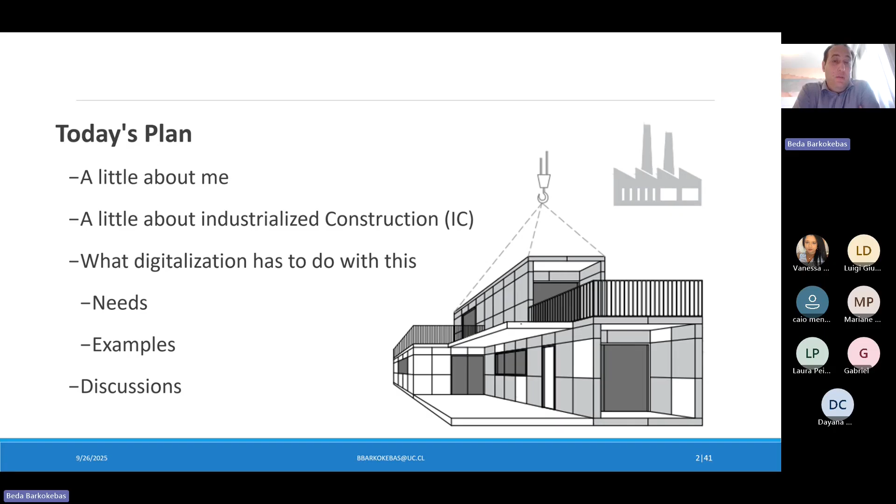So today's plan, we're going to talk a little bit about me, a little bit about industrialized construction, and we're going to talk about what digitalization has to do with this. We're going to discuss, more importantly, what are the needs and give you some examples of what can be done on the research side and also on the industrial side. And then we can talk about it.

So, as you guys already know, my name is Beda Barkokebas. I'm a civil engineer from Brazil. Well, I'm actually from Canada as well. I'd like to point this out. I'm a proud Canadian myself as well.

So I did a master's degree and PhD in Canada, the University of Alberta, and those are some of my projects.

I say that I have two hats. One as an engineer, as a construction engineer. I started my path in industrialized construction actually in the industry, doing social housing in Brazil with concrete-based systems. Then I moved to steel structures, heavy steel structures, light steel frame.

When I moved to Canada, I started working with modules, wood modules, wood panels, pretty much wood in general.

Then I started working again in Brazil as a consultant, developing some products for social housing, for mid-rise buildings. And lately, I've been doing also bathroom pods. And here are some of the companies that I have the pleasure, or had the pleasure, to work with.

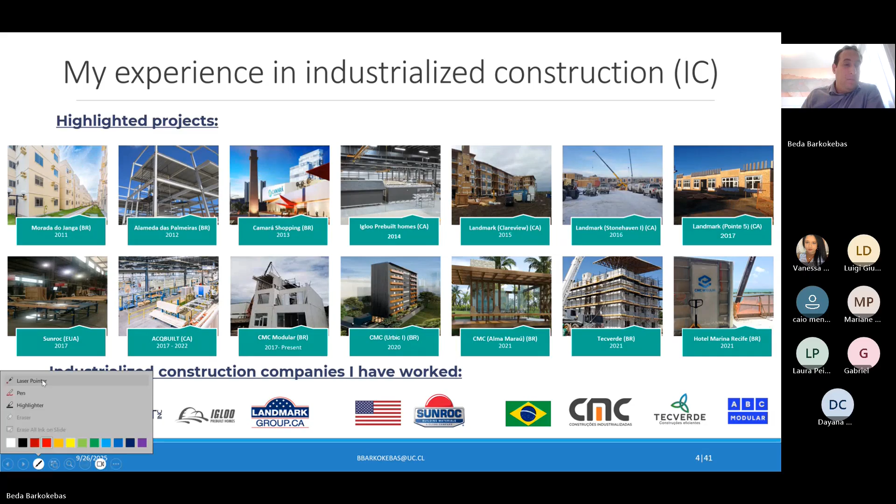On my academic hat, I work on the belief that data and technology can actually improve our productivity. So basically my motto is use data to improve processes, to improve physical processes.

So I do a little bit of product development. My main expertise is actually simulation, Monte Carlo simulation, discrete event simulation. But I also do a lot of programming regarding BIM, automation of design tasks and procurement tasks using BIM, and also I do data mining with sensors collected on the factory to improve productivity at the factory using data.

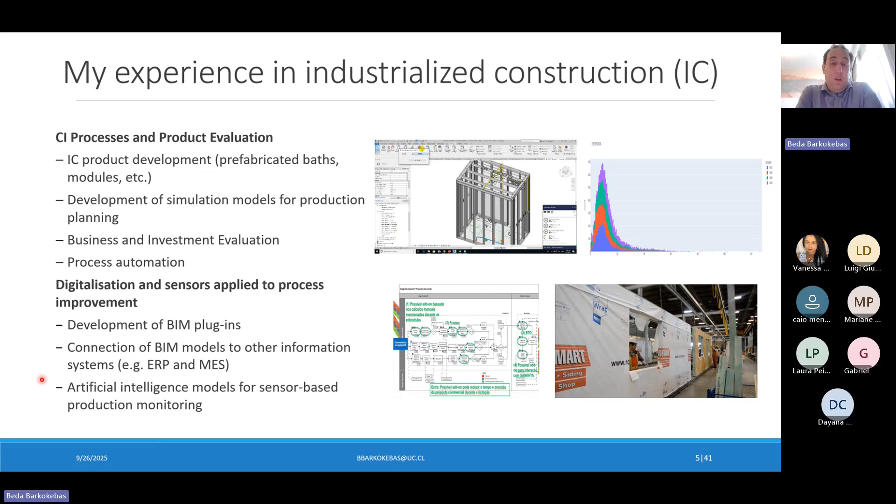So why change? A lot of my friends ask me, why do you want to change? Why do you want to shake things up with industrialized construction? I'm sitting in a hotel now in Brazil, and as far as I know, nothing here was industrialized.

So I always say that the construction industry has two problems. One is the productivity problem. You guys already know that the construction industry is not as productive as other industries, etc. We all heard about a project that is under budget, over budget, that is delayed. It doesn't matter if it's an infrastructure project or if it's refurnishing the bathroom of your mom. We always hear about construction projects that are over cost and delayed.

And if that's an industry problem, I think it's not that big of a deal. It's a big deal, but it's not that big of a deal. But I think the construction industry, which affects society so much, this becomes a social problem. I'm not saying that we have housing problems because of the construction industry. I'm just saying that a big part of why we still have a social housing problem or infrastructure problem is partially because of the construction industry.

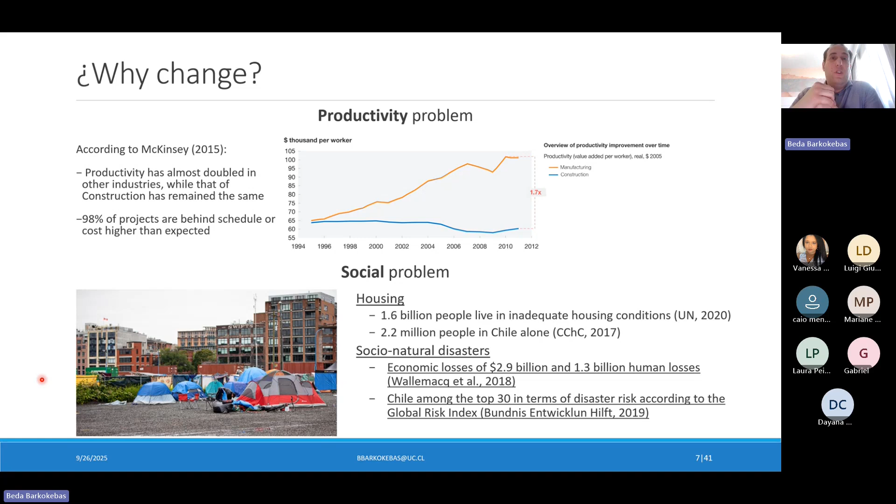So talking about industrialized construction, I'm not going to do a lot of discussion on the definition. I actually enjoy this definition, and we can use it for the context of this class. This is from the Housing Ministry of Chile, which says that industrialized construction is defined as the act of executing construction in an industrialized manner, generally in a plant or factory, integrating one or more elements in which all components are integrated into a global process of execution and assembly, mainly applied on assembly and finishing activities on site.

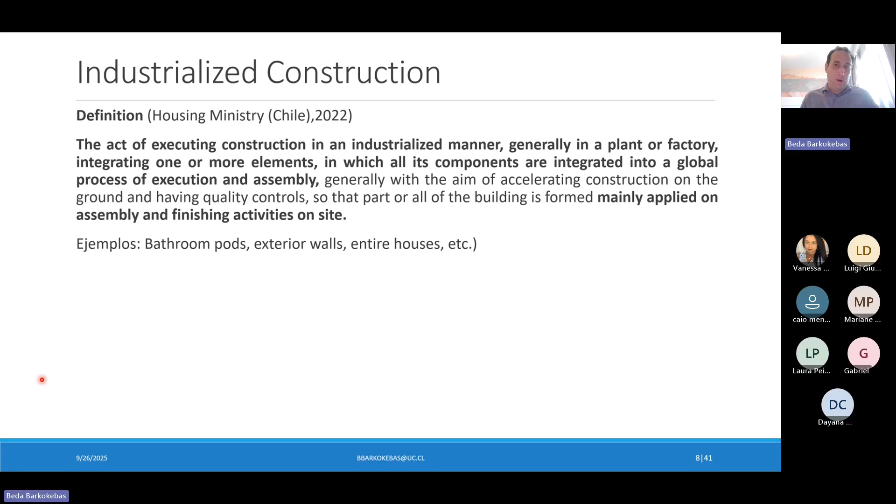So a few examples are bathroom pods, exterior walls, entire houses. But one thing that I like about this definition is that it's not really focused on the product, but on the process. And that's where things change. We improve the process, right? It doesn't matter on the material, and industrialization is often confused with prefabrication, and that's not necessarily the case, right?

So you can industrialize your job site without needing a plant. You don't necessarily need to prefabricate everything in a plant, in a factory. You can industrialize your job site with some construction methods to increase efficiency in your job site. So that's why I think this definition is so powerful. But again, if you have a different definition, I'm okay with it.

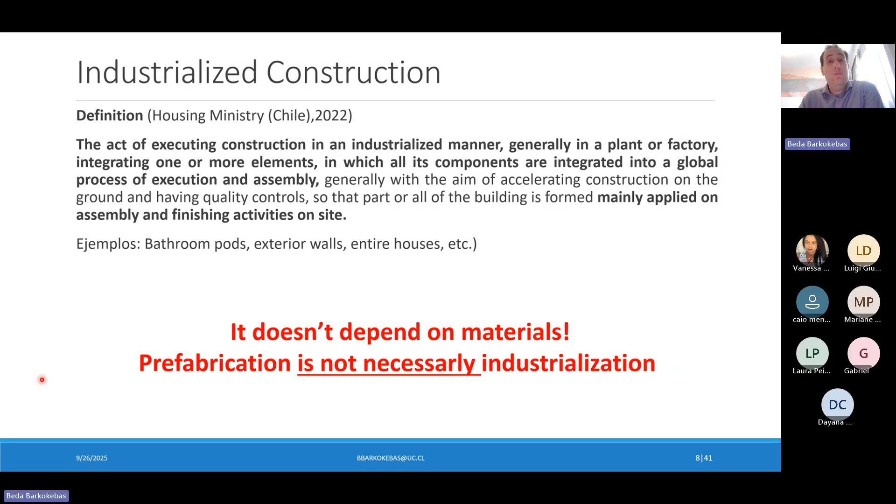So modern methods of construction is a taxonomy that was asked by the Housing Ministry of UK. So they didn't develop this themselves, they hired a consulting company to do that. So in a way, what is a taxonomy? It's a way of putting different industrialized construction methods into boxes.

So we have 7 categories. The first one is modern methods of construction 1, 3D structural systems. So pretty much boxes, right? Usually rectangular, but you can have different shapes. What matters is that it's three-dimensional and structural.

Then you have 2D structural systems, which are panels - walls, floors, roofs, everything that is 2D, you can put in this box. Then primary structure - sorry, I have to update this - but we're talking about linear structural elements: beams, columns, stairs. This is actually really applied in industrial construction.

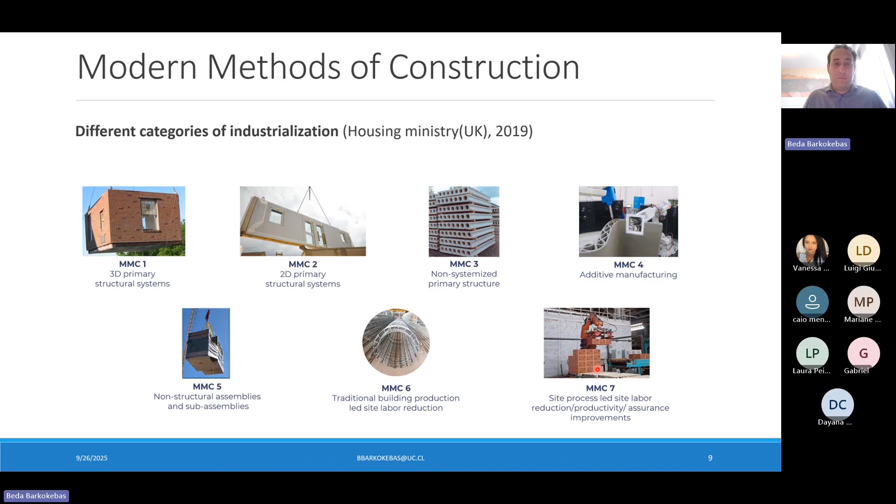So what does digitalization have to do with that? In the context of industrialized construction, we have two key main differences. According to the Handbook of Construction Tolerances, for a traditional reinforced concrete structure over 25 meters in height, I have a tolerance of 75 millimeters.

If it's inside, we're talking about 152 millimeters. If we're talking about a precast column, this tolerance goes from 76 millimeters to 25 millimeters. So if I go to an industrialized construction method, my tolerance is reduced by a third. Something similar happens also in steel - my tolerances are much more significantly reduced, which is tough to do, especially when I have an interface with on-site elements.

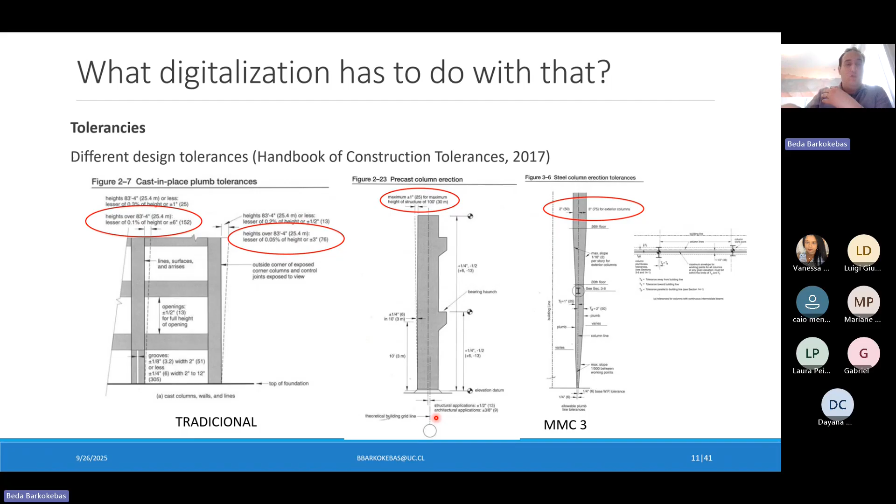So, for instance, my column can be prefabricated, but the foundation is done on site. So I really have to be careful here, not only to design a lower tolerance system, but also to predict how this reduced tolerance is going to play out when you go on site - when I have to assemble this precast column into a foundation that was done on site.

And also there is the data management aspect. You all know about the life cycle of a project, but when it comes to fabrication, that's a different ballgame. We're not used to doing fabrication models in construction - we're used to doing shop drawings, which, in the first place, follow a tolerance that is 3 times higher.

Every industrialized contractor has their own way of doing things, and that results in a lot of duplication of data because there is mistrust about whether the information that people on site send you is actually correct. If the MEP disciplines take into account the construction system done in the factory, and not a lot of people do fabrication models or fabrication drawings for a living in the construction industry, every company ends up doing their own thing. But nevertheless, they have a lot more common challenges than they would think. That's another story though.

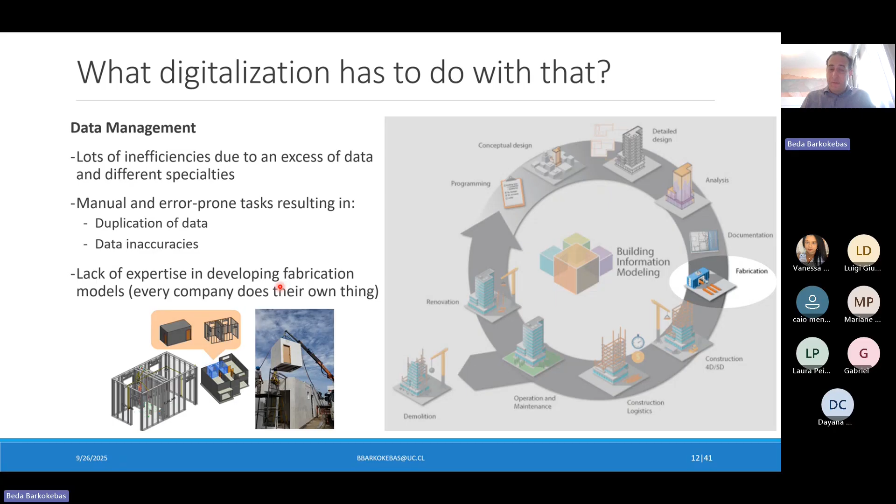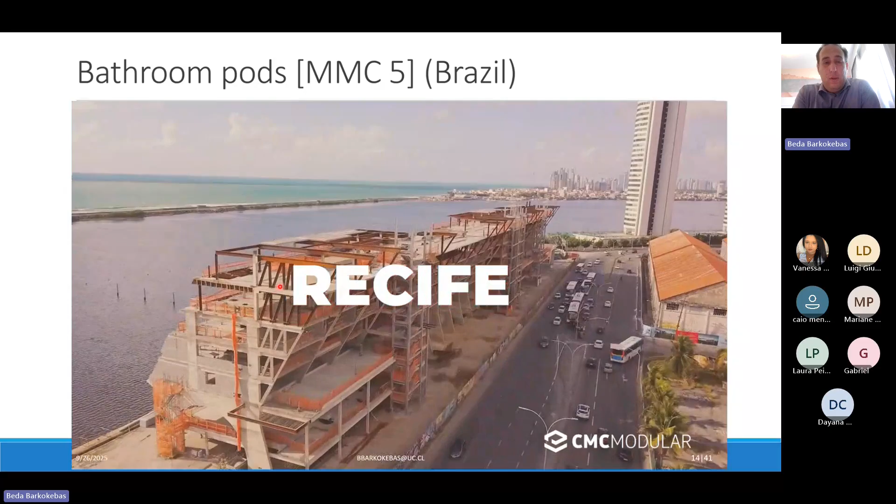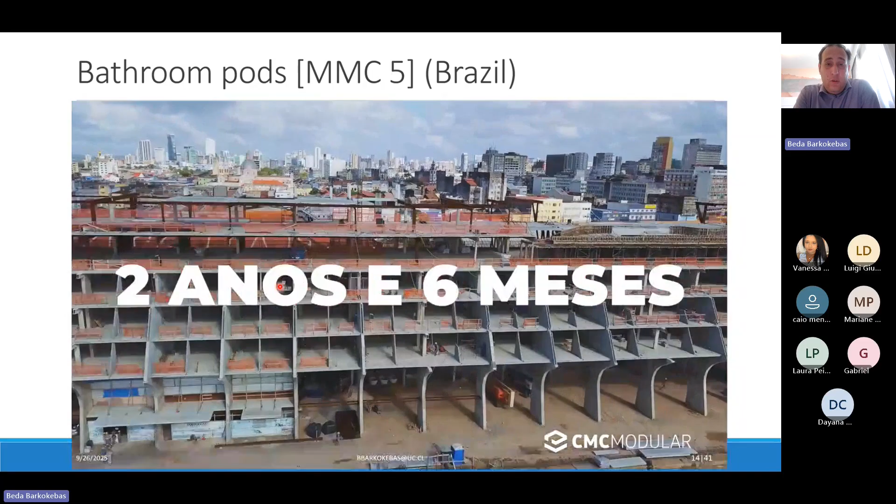So let's dive into some examples. This is my city in Brazil, Recife. This hotel was actually done on site, and the structure is very complex, shaped like a sailboat, which is good for the architect but challenging for the engineers.

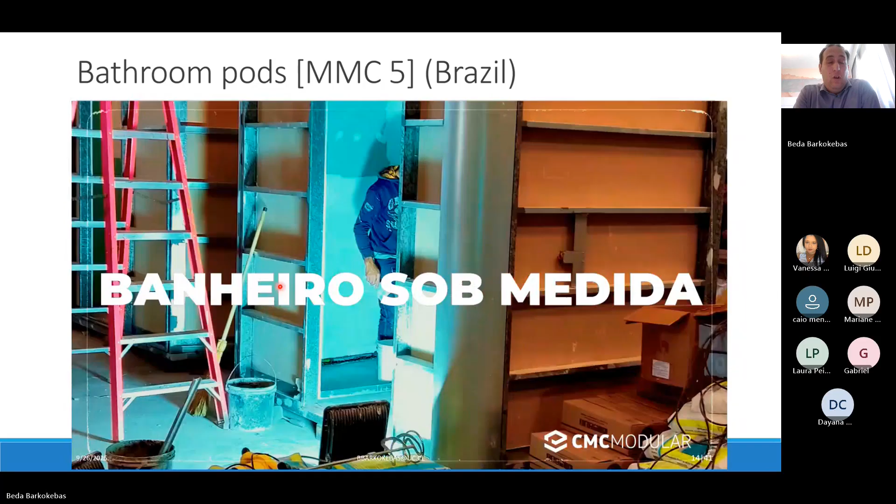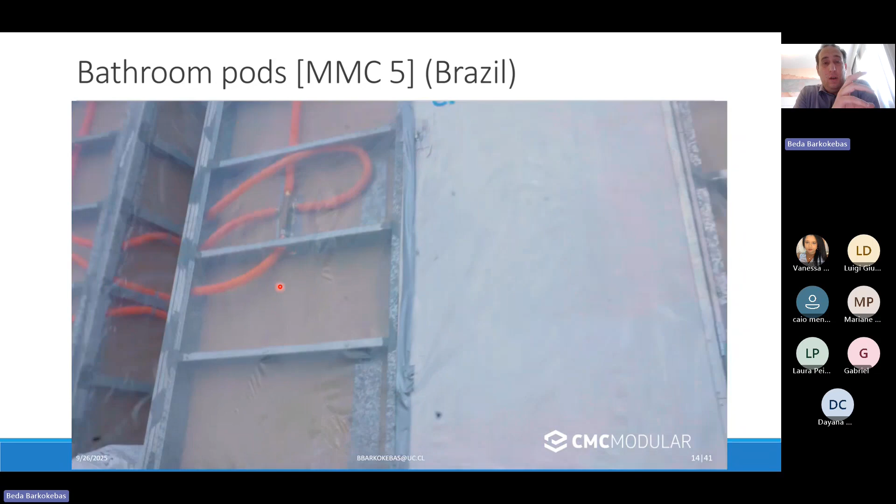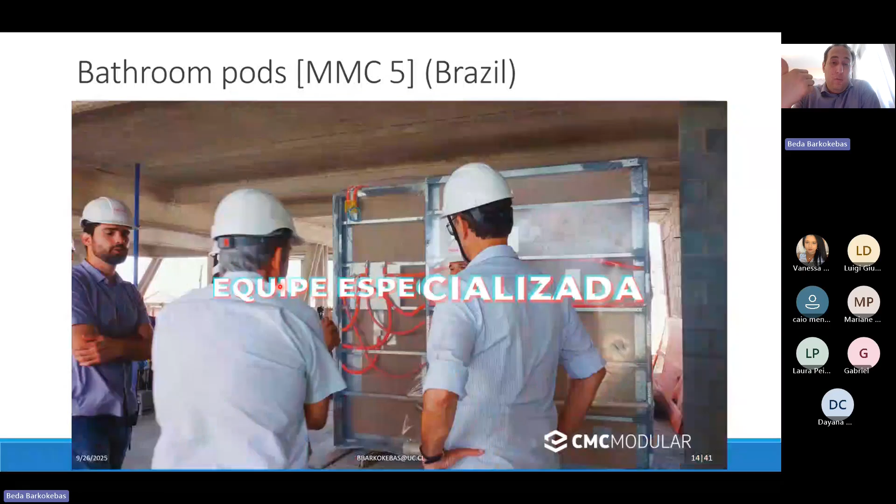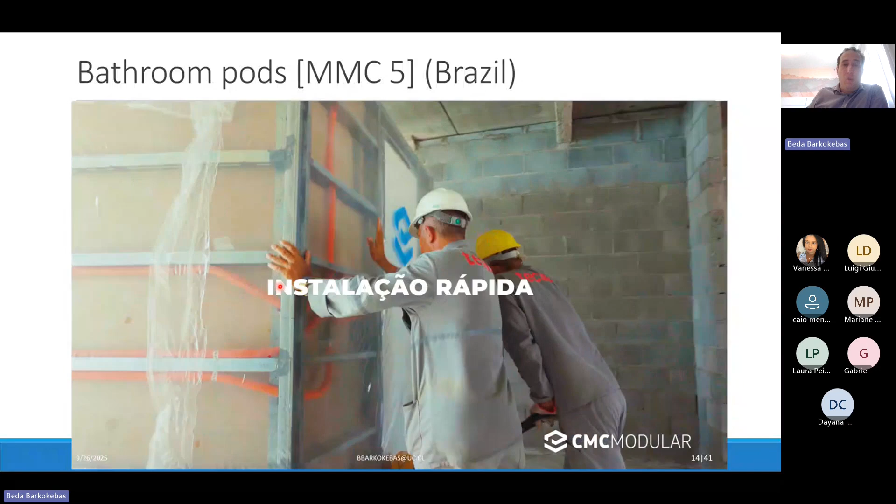After the structure, the bathrooms are a very complex area of the hotel. In this project, the decision was made to remove the risk of building 320 bathrooms on site with a really tight schedule, and instead do that at the factory. So the structure of the bathroom, the substructure, all installations, waterproofing, and finishes were all done in a factory around 3,000 kilometers away from its final destination.

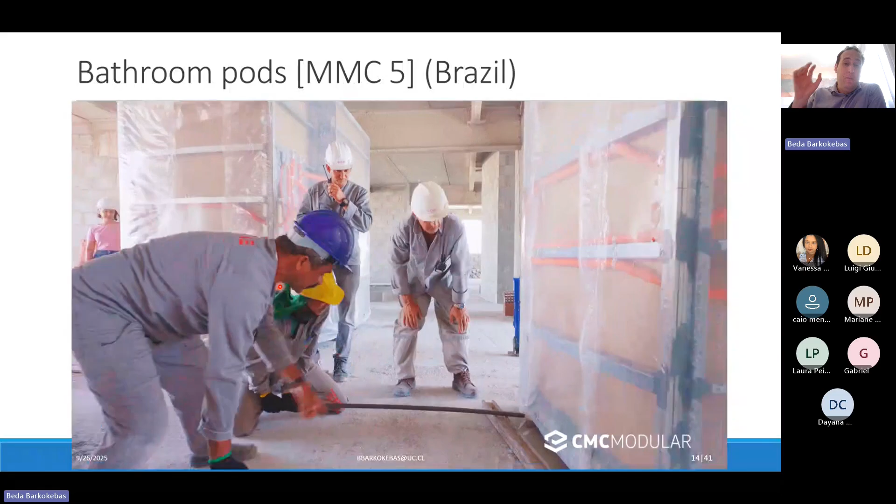This bathroom was tested a couple of times in the factory, placed into a truck, driven 3,000 kilometers, then rigged by a crane and installed in its final destination.

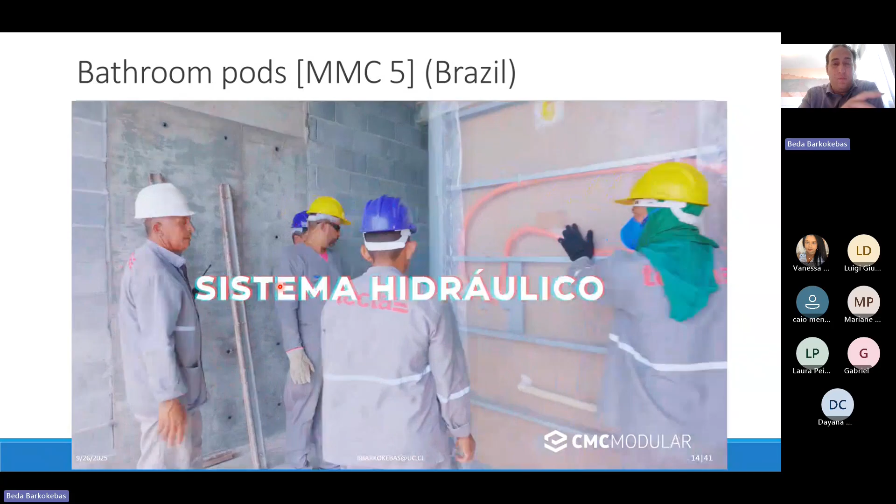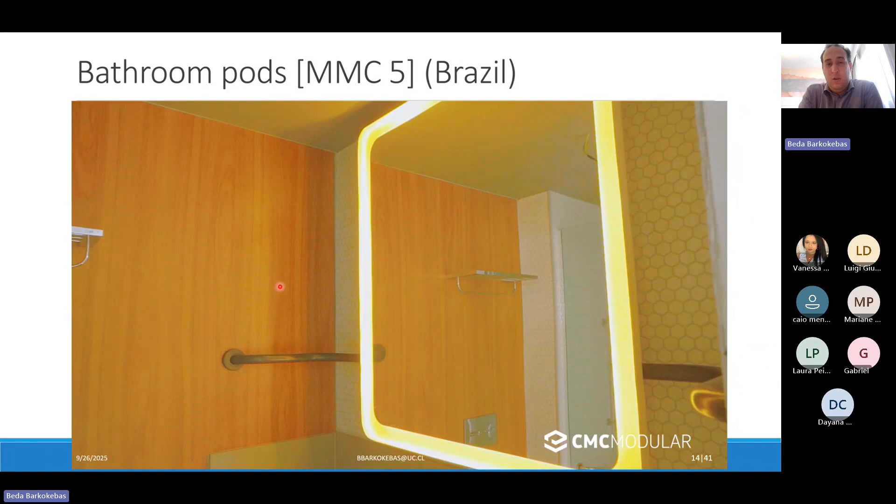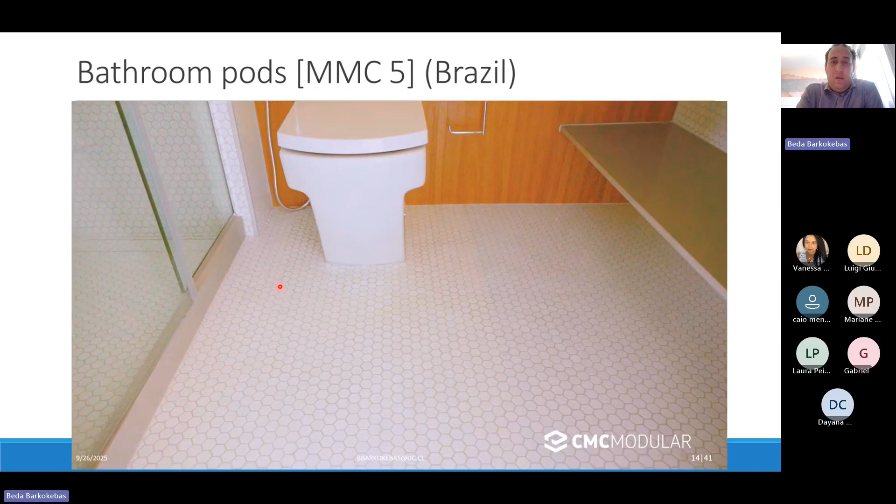So those are the two prototypes that we've done, being placed at their final destination. Everything you see inside was actually done 3,000 kilometers away. Of course this is a 5-star hotel, but as you can see, the level of finishes is very good.

These two bathrooms, by the time they arrived at the site and were placed and tested, were good for use in around 5 hours. So 2 bathroom pods in 5 hours. Then they accepted the prototype, we started production, and the other 318 pods were delivered in 4 months. So 320 baths in 4 months.

We had less than 2% material losses on site. According to the client, they had a reduction of 20% in schedule. I talked to the contractor and reviewed the quality check, and only 5% of those bathrooms had defects on site after installation. That 5% is something, but I'm pretty sure those are results that are not easy to come by in traditional construction.

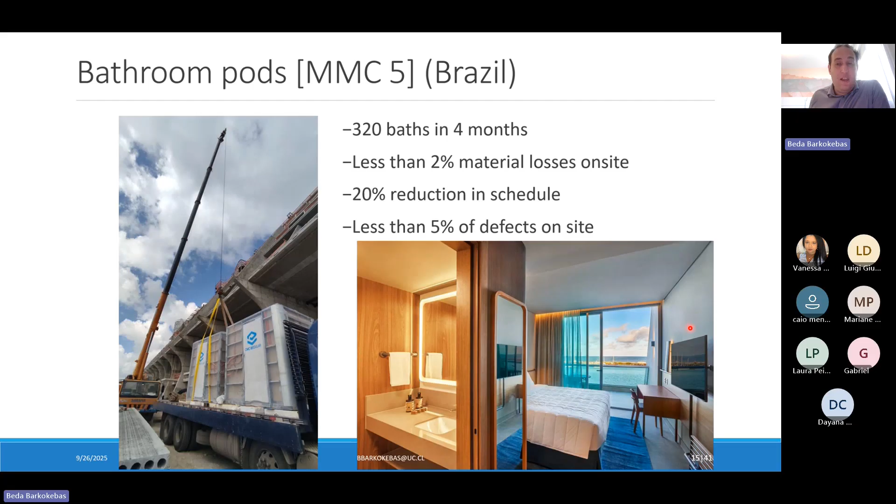A lot of people ask me what's the difference in design between traditional construction and industrialized construction. The best way I like to put it is that it's a structure that walks. So for this bathroom, if I do an industrialized construction bathroom, I have to comply with all the codes applicable to traditional construction, no questions asked - electrical codes, sanitary codes, fire protection, structural, you name it.

At the same time, I have to account for torsions that this bathroom is going to endure while being transported and rigged. So in a way, the structure of a prefabricated pod bathroom is actually stronger than traditional construction, because traditional construction doesn't have those stresses, while in industrialized construction I have to account for all the transportation stresses. Those are dynamic stresses - we only have static stresses in traditional construction.

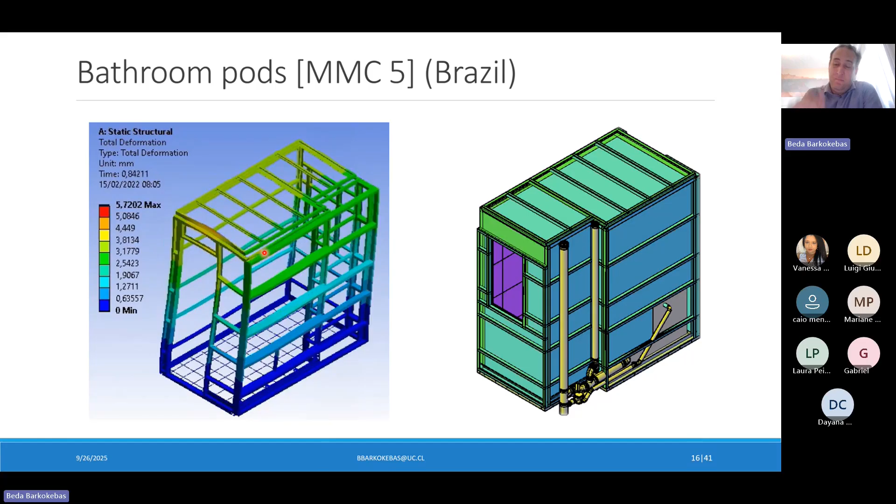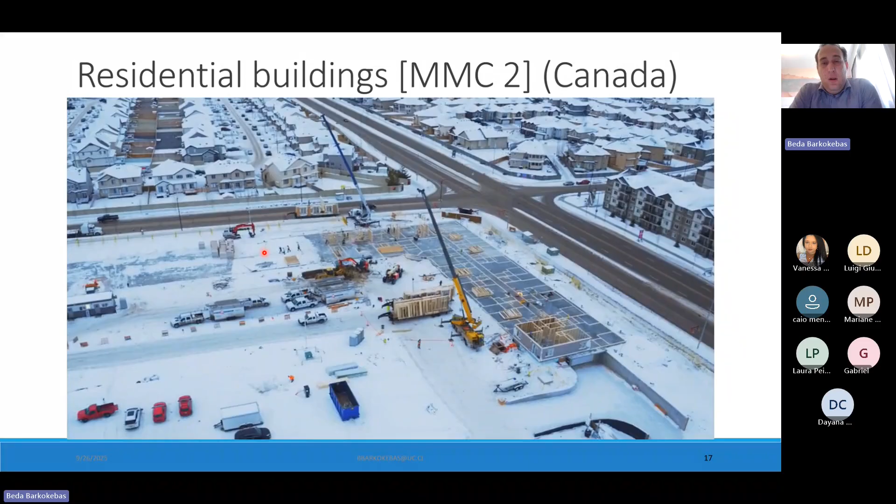So I'm going to show you my city in Canada. This is Edmonton. I was very happy, very fortunate to work in the first panelized building in my city. So what you can see here, this is a residential building.

It's a four-story building. In Canada, we do a lot of wood construction up to 6 floors now. At that time, it was only four. That's what the code allowed, but now we can do up to six. And what you can see here is we're talking about 64 units.

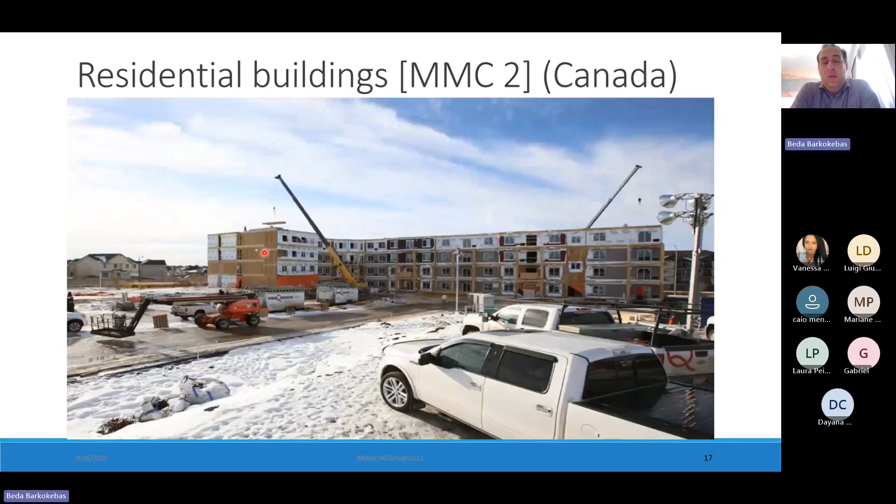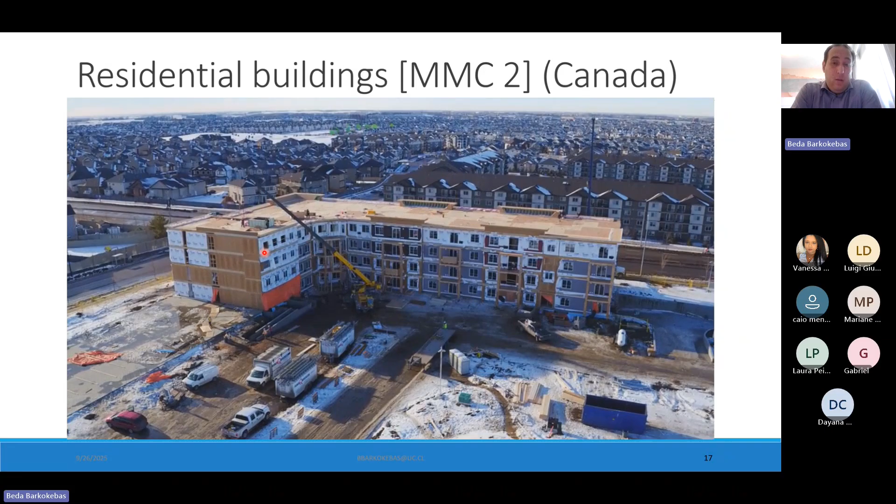All the panels, all the floor, roof, and wall panels, they arrive prefabricated, with exterior finishes, windows, doors, insulation. This is a time lapse of 25 days. The original schedule would account for 4 months, and we did it in 1 month.

Some information about this: those are 64 residential units. One thing that is important to note is that in Edmonton we have to do a mix of building or of apartments. So I need to have a certain percentage of one-bedroom, two-bedroom, and three-bedroom apartments. Because of this L-shaped configuration, we have 64 units, but also 13 types of apartments.

Which is a challenge because, like, I loved in Brazil when we did the same apartment and just mirrored the building, then did one or two types of buildings and replicated these across. Here, that's not the case. It's just a characteristic, an aspect of construction in Edmonton.

So we have around 25% reduction in schedule, a reduction of 20% in wood consumption, and 60% less waste in wood, for obvious reasons, since we did it in a factory, so it's much easier. You don't have a lot of waste on site. And this factory is actually 50 kilometers away, so it's much closer to the job site than in Brazil.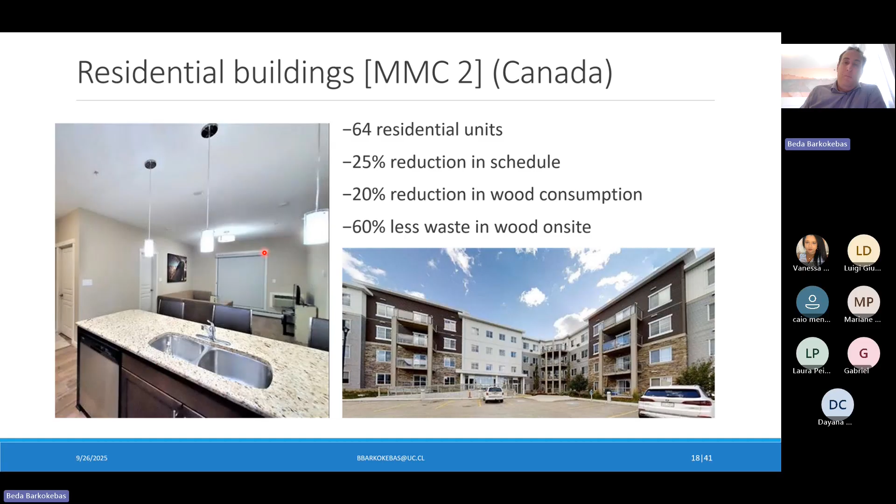One thing that was a big deal—at that time I worked for the construction company. Later I ended up working with the contractor. But at that time I was working pretty much on site, so I really didn't care about the fabrication. I cared about the assembly.

One thing that we did was actually going 4D, because we wanted to know at which stage we were so we could coordinate all the trades. I'll show a couple pictures of that afterwards. We did coordination in BIM to make sure that all of the MEP systems would fit right in, because we have to do all of that later on site.

And then you have some color coding here, and some models. We did some of this work, so it was a fun project to work on.

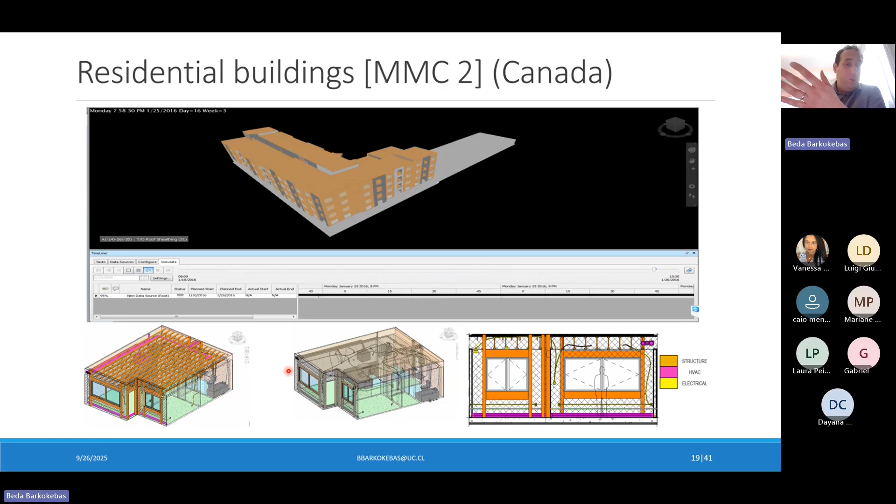So this is it, some pictures. The first week we started on this slab. In Canada, we do the garage on the ground in reinforced concrete.

The reason why we were so eager to know the construction direction of the building is because we had to coordinate trades. It doesn't matter if you do the structure really quick if the other trades don't come along. So we had to start construction doing the risers.

Those are the main gas lines. We have 16 units, so 16 plus two shafts, which is 18 risers. By the time we reach the third floor, we can actually be ready to start building the risers and start walking into the units.

Here you see some pictures. We did a coordination so we could pre-drill most of the stuff. Second week, we already had the gas lines and the piping, and foam insulation. Edmonton specifically is a very cold climate—it's like minus 30, minus 40 degrees, and all of that.

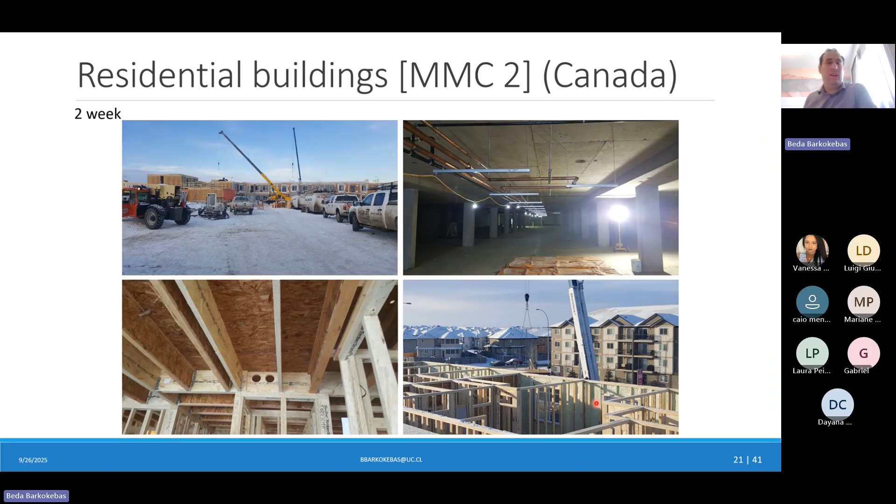Third week, unfortunately we didn't get everything right, so we needed to drill a couple more holes. Nothing is perfect, I'm sorry. And this is the checklist of each apartment to make sure that they're good to go.

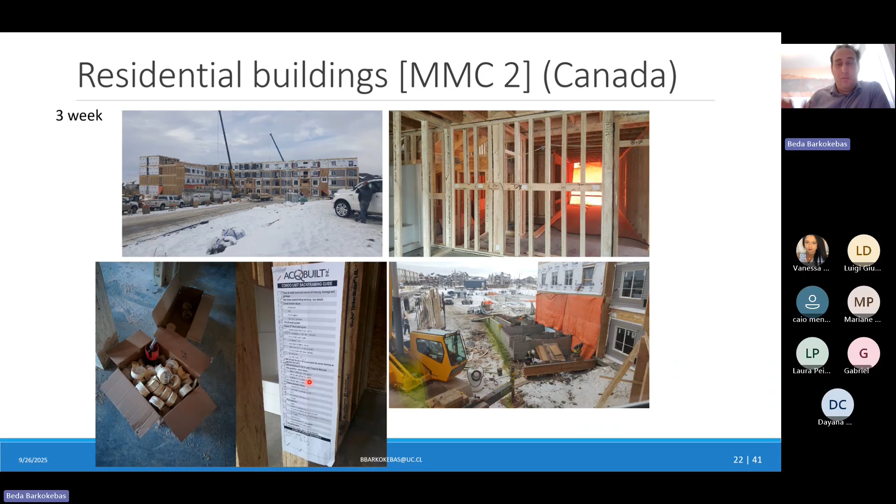We started doing the ramp for the building, and this is the factory. The factory is much more automated than in Brazil. As you could see in some pictures, the Brazil factory has a lot of manual intensive work on the roof. That building method has a lot of advantages, but you don't take advantage of further mechanization as you do here in this factory in Canada.

Again, what I was telling you about digitalization: we have schedules, material inventory, BIM models, and CNC files here. These machines are fed, they know what they're doing because of the CNC files. And all of that has to be precise—the procurement of materials has to be precise. So we have different challenges. From here, 50 kilometers later, we have this.

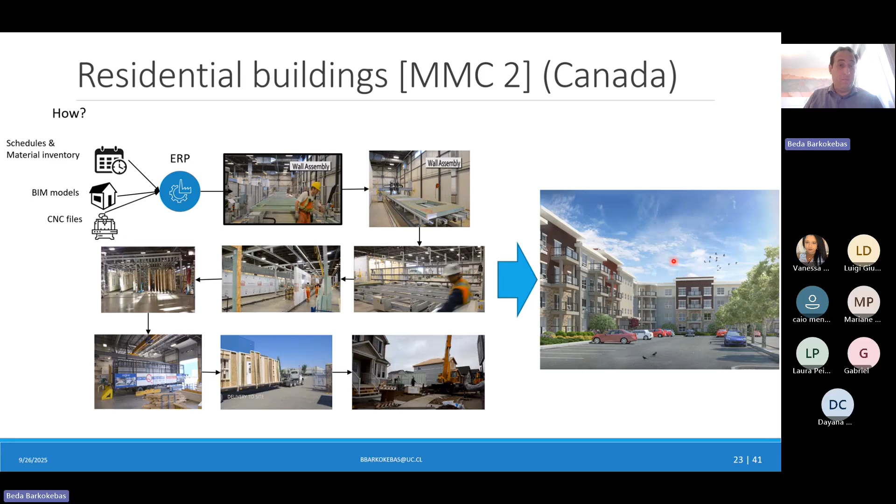So now I have a question for you guys.

So we have 3 out of 3. Okay, we have someone else. By the way, I'm not doing a test here. There's no right or wrong answer, I promise. So we have a higher preference of bathroom pods. Oh, now we're tied. Okay, awesome.

So someone would like to share why they selected the pods or the panels? What do you guys think? I'm sorry, are we allowed to have conversations during class? Yes, of course, of course. Don't worry.

I don't think there is necessarily a right or wrong answer to this. I think it's really project dependent. And in reality, a lot of people expect, when we talk about industrial construction, they expect this: prefabrication, panels, giant modules, a factory, robots, lasers, and all of that. But in reality, this is a much longer journey.

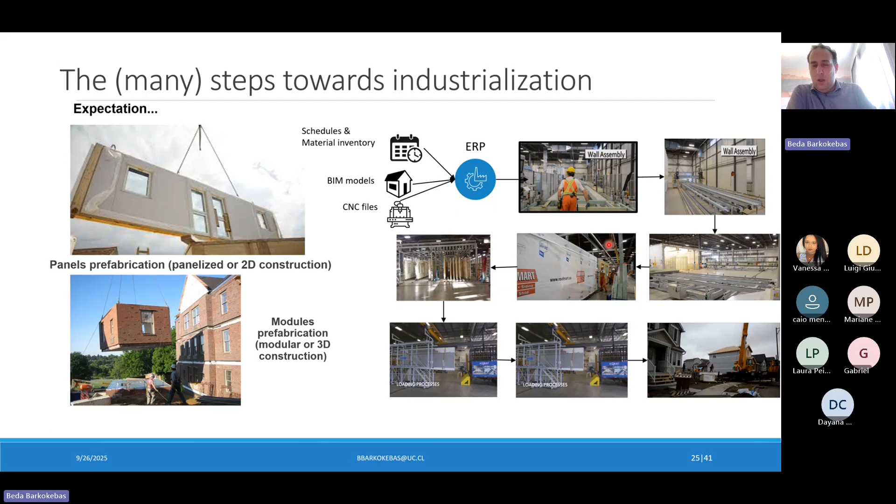Because this right here costs a lot of money, and you have a really high risk. So in reality, at least in my opinion, you shouldn't start shooting for the stars right away. You start slow, improving something on site, then start prefabricating something, and find the sweet spot for you, because as you industrialize more and more, you're going to increase your complexity.

Yeah, that's a fact, that's not up for discussion. If you start including more elements, adding more value, more scope to a prefabricated element, or to something you want to improve on site, you're going to have more elements to deal with, different disciplines to deal with, different aspects such as constructability, cost, performance. So that's going to add complexity, which is not inherently bad, but needs to be justified.

So that's why you have a lot of examples: exterior walls, modular construction, structural elements. But for instance, if I have a high rise, it doesn't make sense to industrialize the structure. You can prefabricate the facades because it's tough and complicated to do facades, very complex. You can have a bathroom pod of steel, or if you're doing some sort of precast and need to place the concrete, you can do concrete bathroom pods and leave the negative reinforcement to be solidarized with the concrete pour, or you can do the full build, the full module.

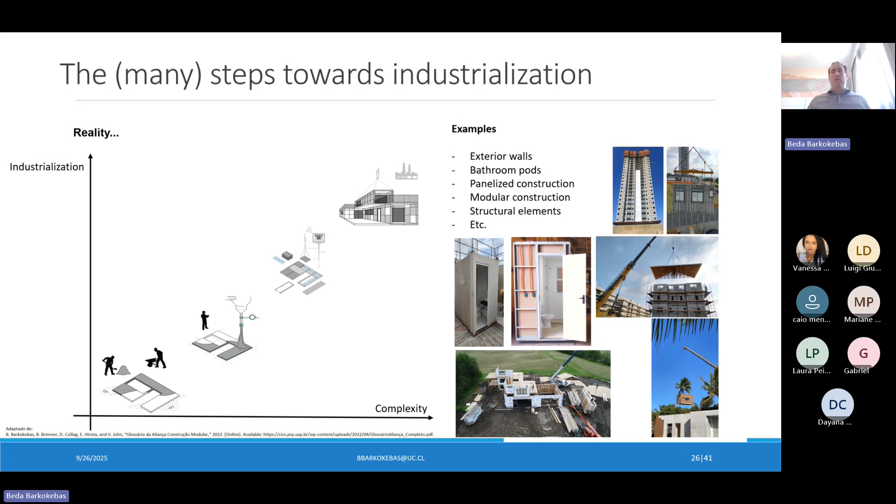So now that we finished talking about industrial construction, how can we improve processes in industrial construction? So now we're going to talk about BIM in the broader sense of digitalization. I'm not going to discuss BIM with you guys in detail, I'm pretty sure you have much better professors for this, Professor Fabiano, Professor Toledo, who can give you a much better lecture on BIM than me. But I'm going to use BIM here as a technology, not necessarily as a methodology, but as a technology that can help revamp productivity in construction, taking into account the specific context of industrialized construction.

So now, some things are very different. For instance, in a traditional project, I need to know how many doors I have. Here in modular construction, I need to know how many doors I have in each module.

So I work with a company that realized that because they do a lot of oil and gas projects, and the design is very standardized, they spend a lot of time, 40% of the time, actually doing takeoff and doing imports for the cost systems. And we don't have, for instance, software that is specific for industrialized construction. So that's why I think we have a big opportunity here to develop new methods, to develop new frameworks on this.

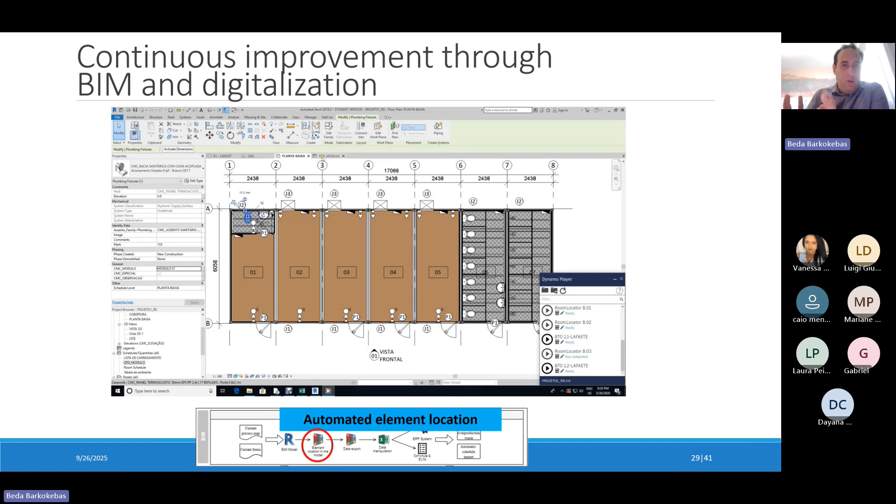So basically, we have this blank parameter here, and I developed a plugin that actually locates all the elements according to their modules. So now when I go back to the takeoff, I can actually identify each module, each element according to module.

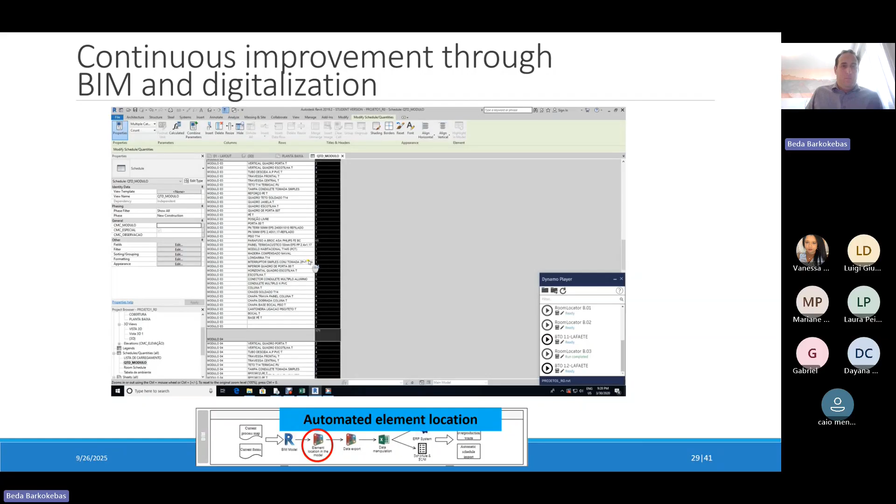But this doesn't really work for me because estimators don't really care about BIM, but they do care about Excel. So basically what I have is that I use Excel as an interface. I ask in Excel all the information that I need, and when I upload the Excel sheet into Revit, Revit brings me back all the information that I need.

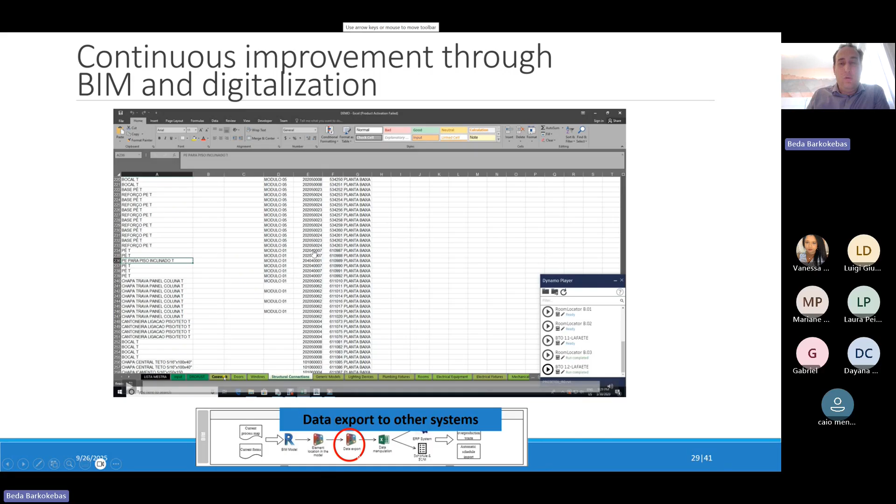So in a couple seconds, we're going to see that I can identify each element according to the module, according to the code into the ERP system, and all of that.

And now I actually not only do imports for ERP systems, but also for checklists. So they have this checklist, which is a takeoff according to each module, and they do this in Excel.

And since everything is in Excel, I can do a macro and actually generate, for a project with 7 modules, I'm going to need 7 lists, and now I can do 7 lists automatically. So this improves a lot.

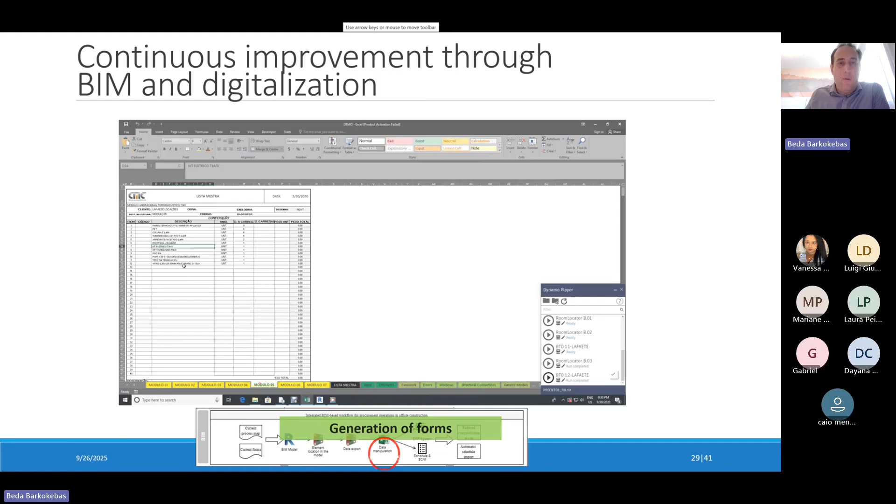Here I'm not talking about the tools, I'm talking about the workflow. The tools, they need to be facilitators for the workflow that we're proposing.

So here we measured around 30% of man hours reduced per project. We had better improved communications, and we're considering a workflow specific for the MMC environment.

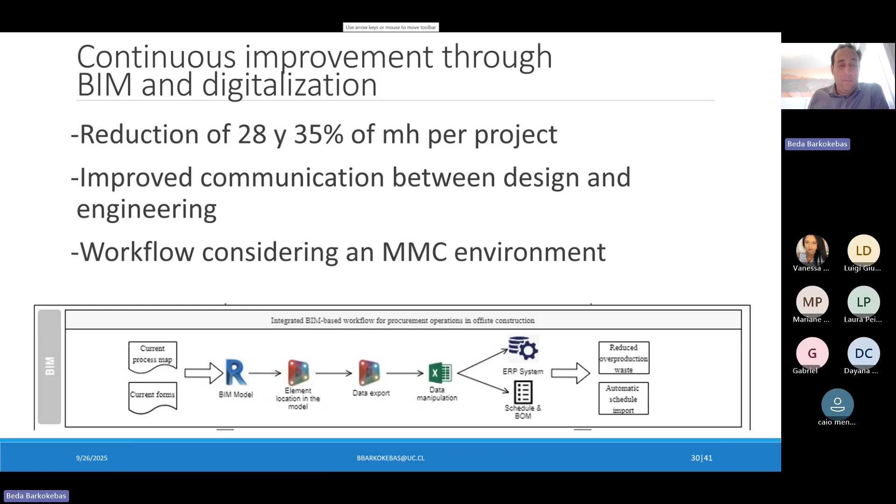We actually applied the methodology, so I suggest you go through this paper here, which is the methodology applied exactly to measure the value of each activity. I think the key contribution of this framework is because if you talk to anyone that does project design and construction, if you ask when something's going to get done, they're going to tell you it depends, because there are so many variables.

So basically, in this paper, we applied a value stream map, a combination of value stream mapping and a Monte Carlo simulation, exactly to account for this uncertainty and to evaluate whether the activities that are being performed actually add value or don't add value to the process according to Lean principles.

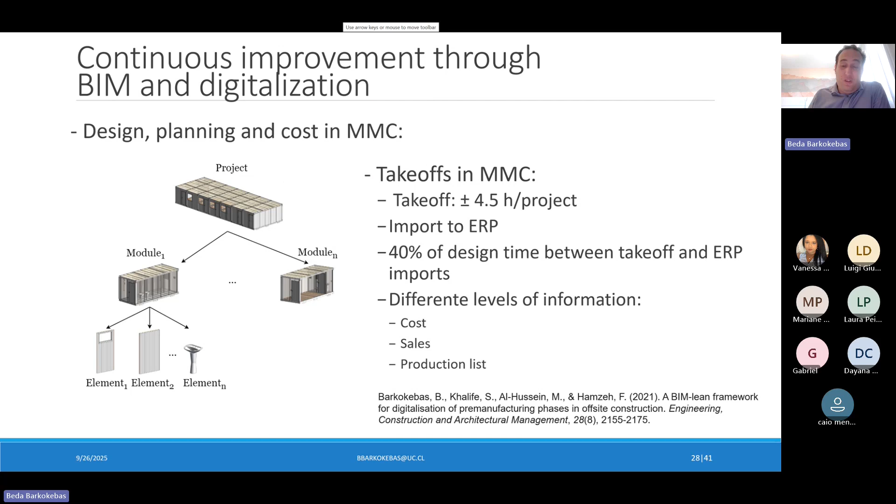The second paper here is application of this framework in another factory, in which we got similar results in the first after 1 year. But then those guys did something very interesting, they decided to change their process according to the tools that we developed.

And they actually managed to get a reduction of 92% on average, which for me, honestly, I didn't believe it at first. But when they showed it to me, I think the most important thing is that they did a measurement about the deviation in the quantity takeoff in 3 different projects, and we got an average higher precision of 12%.

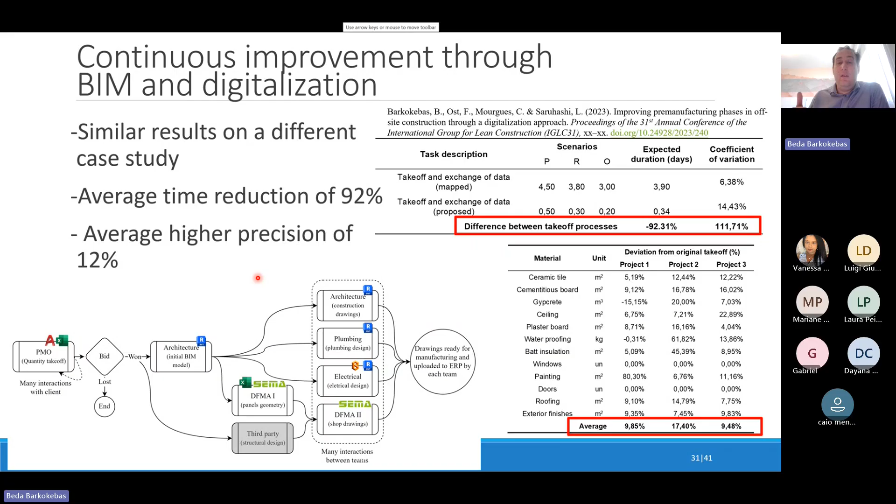So I think, in a way, if you have a higher precision in quantity takeoffs, this is actually more valuable than doing something faster, because now you know that the quantities you're getting are closer to what you're actually going to perform. So you don't overbuy material, and you reduce the risk of not getting enough materials during production.

With the same company, this is post-bid. In this company, we got some of the tools we developed, but we decided to do something different. This is now pre-bid, so the client doesn't know exactly what he wants. He knows he wants a building for a dining room for 500 or 300 people. They do a lot of oil and gas projects, and the issue is the company doesn't really know if they're going to get the project or not. They have to provide a solution for bidding, and that doesn't mean they're going to get it.

Depending on the market, if it's bad times, good times, or business as usual, for every 8 bids they participate in, they get awarded one. That's the cost of doing business—if I win one, I still have to pay for the effort of doing the other 7 bids. They also have a lot of codes to comply with: electrical codes, safety codes, emergency codes. So they need to accommodate the clients, and they have a big demand, participating in around 800 bids per year.

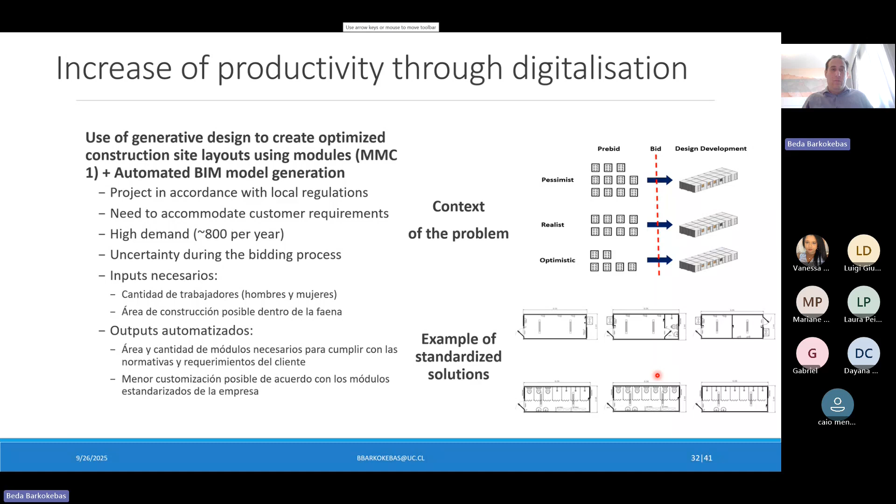There's a lot of uncertainty during the bidding process, and more importantly, they already have standardized solutions—an office model with 7 toilets, 4 showers, 7 showers, and so on. The issue is when you do big projects, you have to change them. For instance, if I'm doing bathrooms for 500 workers, I have to connect this model with another model on top of it, so I have to remove one toilet to make way for the other model, and account for a minimum distance to the exterior door in case of fire hazards, and so on.

So they have two main challenges: generate a layout that accommodates client requirements, local codes, and the use of pre-designed standardized solutions. For that we have a customization index, which we want to keep as low as possible, because that means fewer changes in the original drawings. They also work with BIM without having to model—they want to get all the information without the hassle of modeling a BIM model, which is challenging, but that's what makes my work fun.

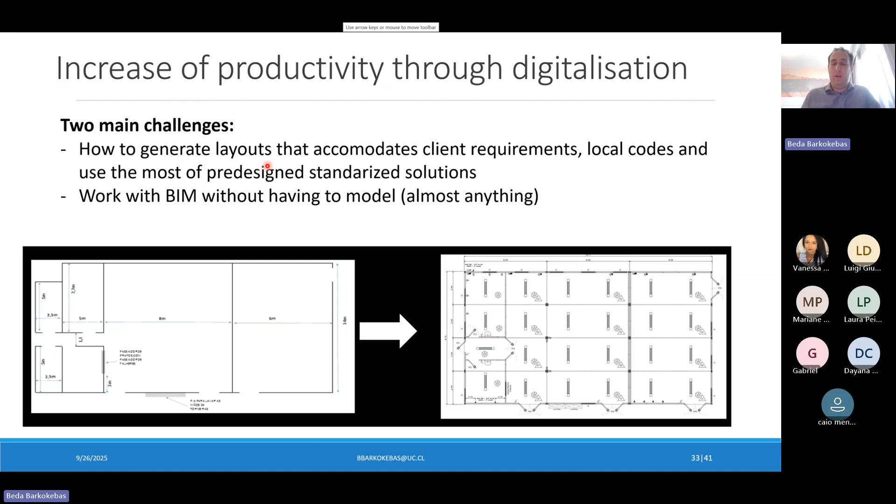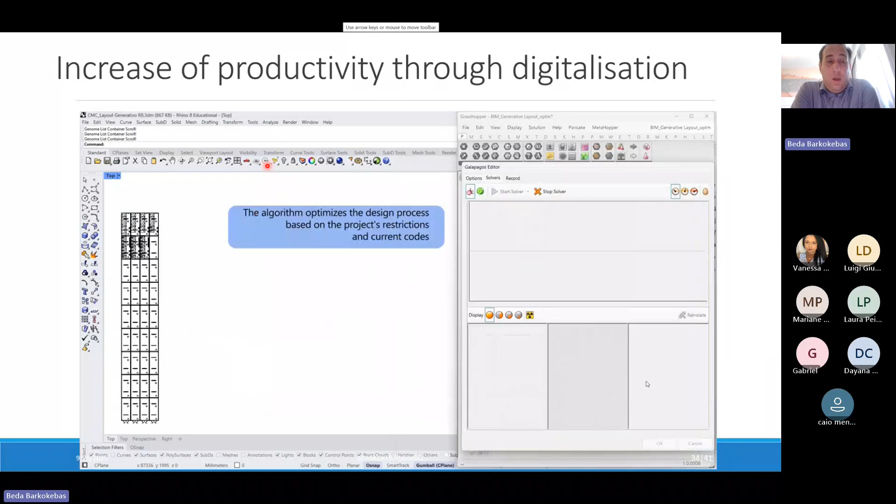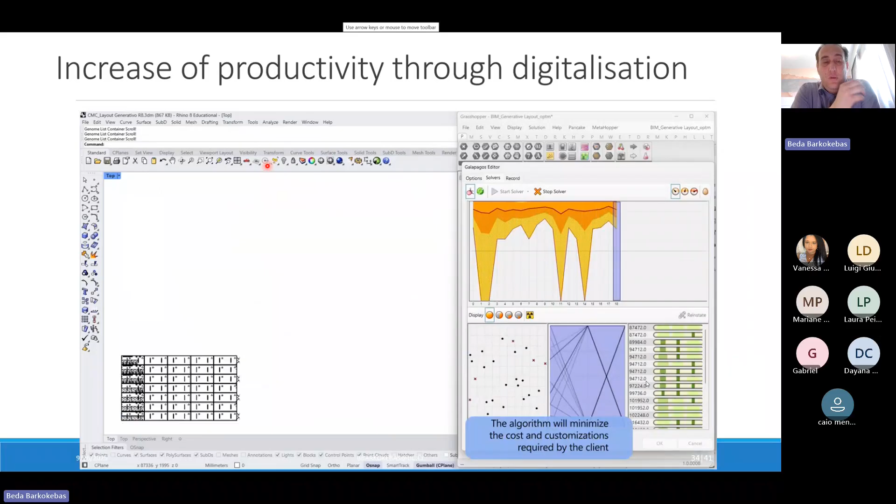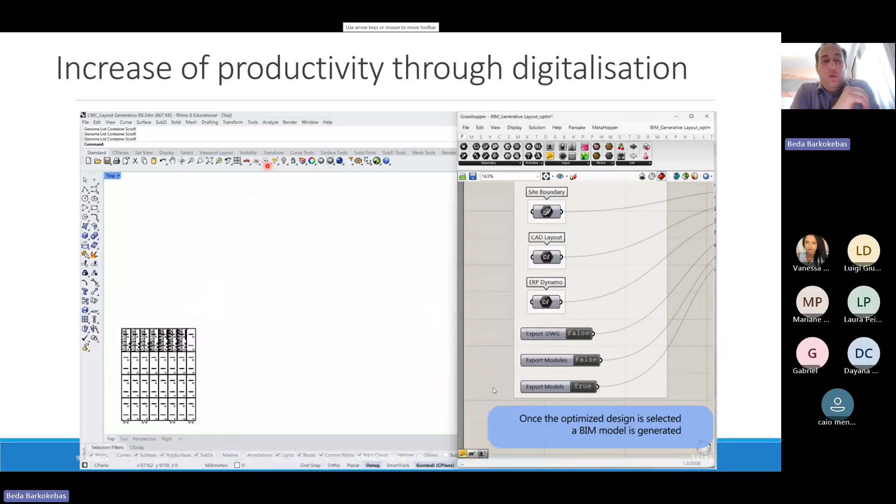So this is a workflow we implemented with this company. We're using a generative design platform called Rhino, which I think is a game changer for me—that's my first experience with generative design, but I really want to continue down this path. It generates multiple solutions and evaluates the best one, in this case to reduce construction costs and reduce the customization index in each module. Once it decides the best solution, we generate documentation to replicate it into Revit so we can get the BIM model.

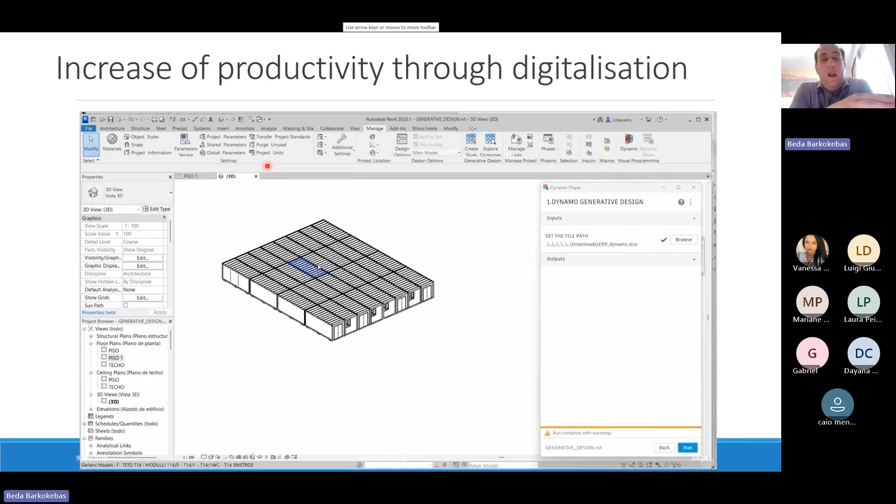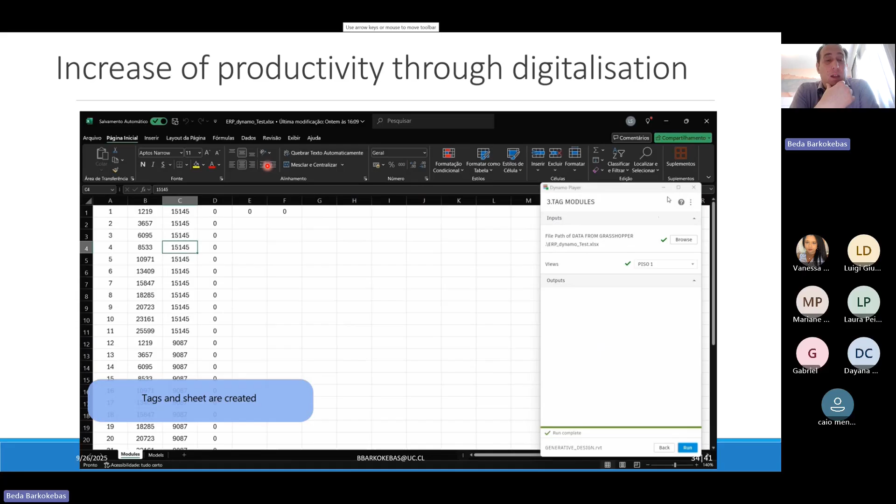So it's not that I'm transferring the CAD layout to Revit in the background—I'm actually replicating this CAD layout into Revit with the preset and modified solutions. Now I have all the quantity takeoff I need according to modules and the ERP system, and then I do some other automation for tagging, etc., and then I get to create sheets. So at the end, I think the video is going to show it.

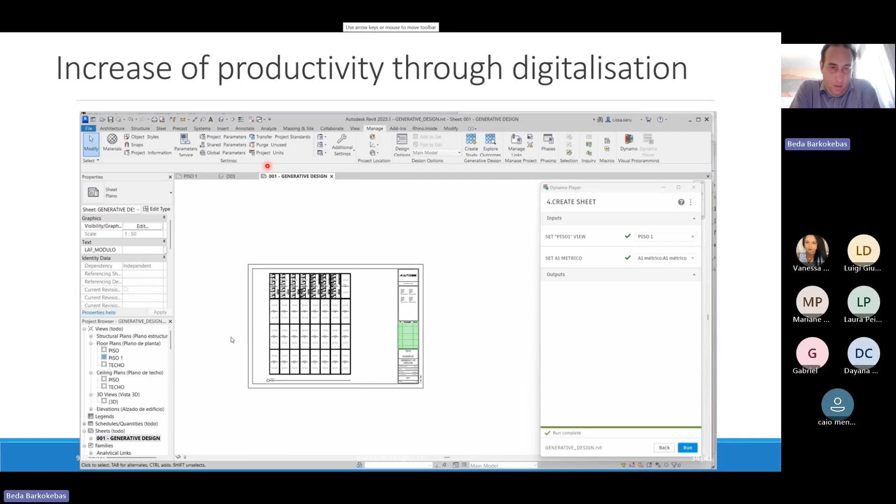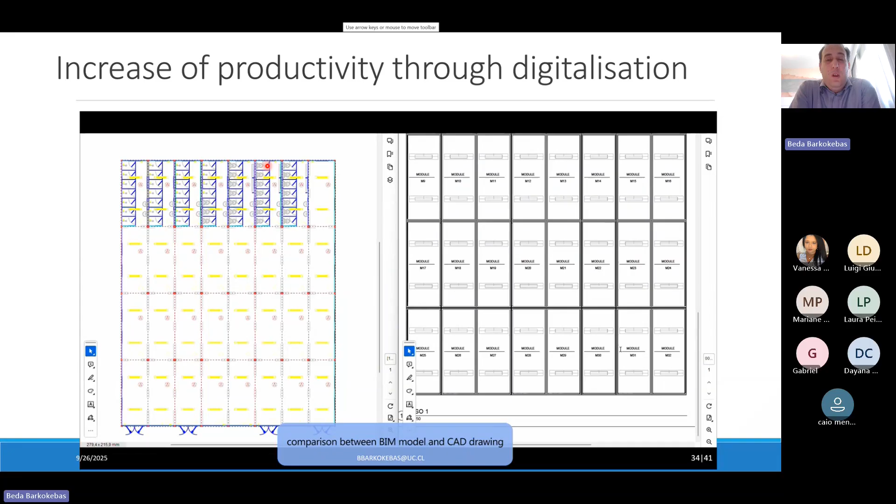So the layout is pretty much what we wanted. That was a fun project—we're actually finishing the master's thesis of the student, and the company reported around 60% time reduction during those layouts, which is quite cool. I'm biased to talk about it, but it's a project I'm very proud of, and I want to continue in this line. I really look forward to continuing with generative design because I think it's a new way of thinking about construction.

To finish, we can talk about something else—a company that Dayana and I were working with in Chile, since I'm in Brazil now—which has nothing to do with prefabrication. It's industrialized construction, but not prefabrication. This construction method is very common here in Brazil, where we do concrete monolithic structures with aluminum formwork. As you know, an entire building is divided into phases, sections like A1, A2, A3, and then they go back.

This is a 3-day cycle in which I pour concrete every day, and then I pour concrete on usually two apartments per day. So every day, between rebar, electrical, and formwork, I pour concrete and I get 2 apartments per day, with one set of formwork, which now in Brazil, I started working with this in 2011, but now in Brazil is pretty much the norm for affordable housing. It's a very cool system. It was the first system, so I'm actually a little bit passionate about it because it was the first system that I worked with.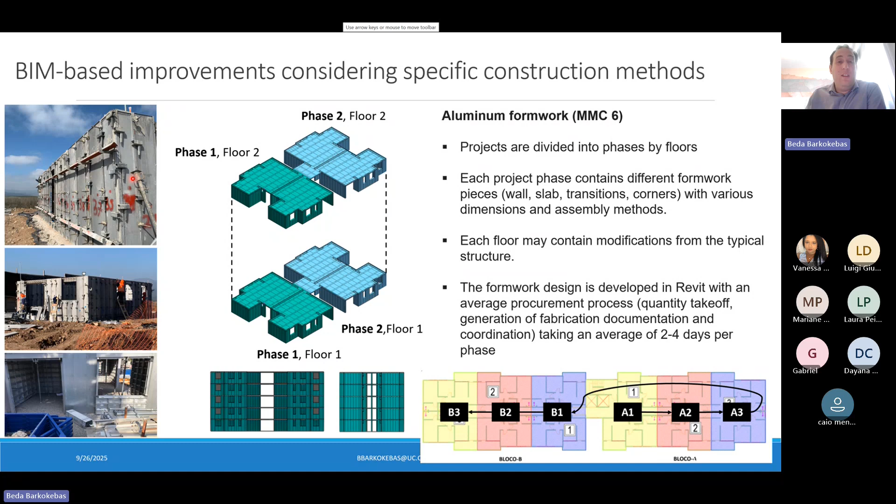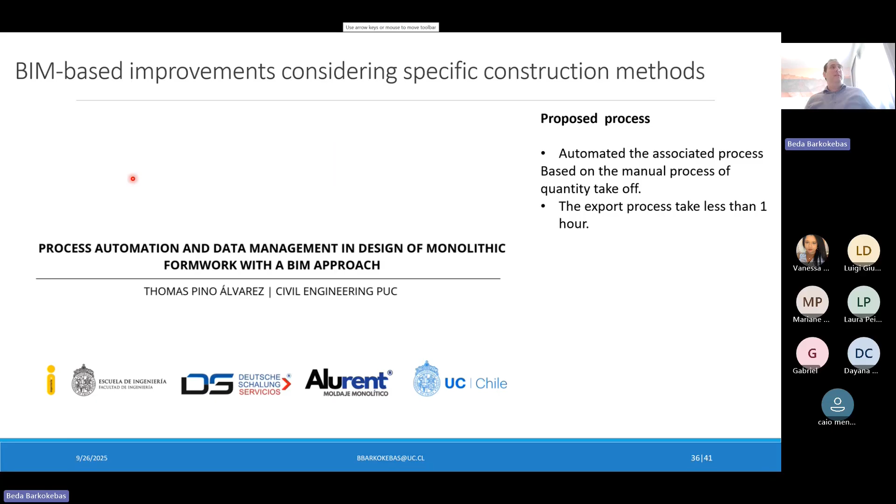And this company that Dayana and I were working with, along with Caroline, that some of you know, they fabricate those formworks and they rent these formworks along with a little bit of selling. So the issue that they had is that they do the manufacture and they do the rental. So when they do the fabrication model for a client, they have to know how many pieces they have in stock, available in stock, for this project, and how many pieces they have to fabricate. This is actually hard, and this changes every day.

So basically, they do a lot of documenting. They need to do a lot of database management, and that's actually something that we helped them with, generating those reports according to the need of the project and what they had in stock at that moment. So we reduced significantly the duration of those exports.

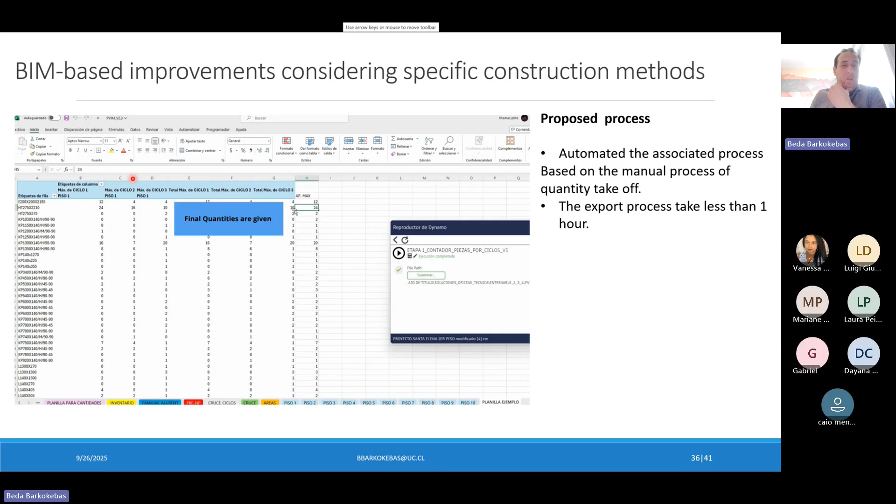So to finish up, we're talking about the structures and etc., but I would like to talk about MEP. If you guys ever worked with any MEP, you know that there are a large number of elements, a lot of connections, very time consuming, and you have an elbow which is 90 degrees with 45 millimeters diameter and 90 millimeters diameter.

And everything that you buy needs to go through a cost database, an ERP system, and each element has a code that is very time consuming to revise, very error prone. You can look at a code like this, and then realize that instead of 30 elbows with 90 millimeters, it's actually 20 elbows with 90 millimeters, 5 with 45 millimeters, 3 with 100 millimeters, and 2 with 45. So it's time consuming, error prone, you have a lot of stuff to go through.

So basically what we did was we applied natural language processing. This is very old school now, people are doing generative artificial intelligence on this, but we decided to take a step back. We decided to apply a more simple approach, computing wise.

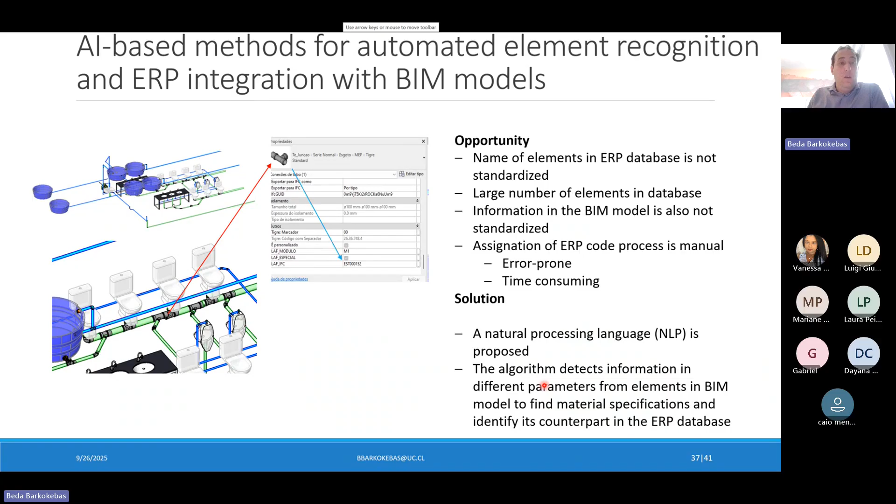Exactly, to detect the information of different parameters. So find the information in the BIM model, match it with the ERP system, and then process all this information that is pretty much written by humans, and identify it. So in the BIM model, we found the information we need for the description of those elements. And we found that in the BIM model, this information is spread out into 5 different parameters. So if we find those 5 different parameters for each element, apply an NLP algorithm to detect if there is a match with what we have in the BIM model and the description of this element, then we can get this code and assign it back to the BIM model.

So this way, when we do all the takeoffs, all the automated takeoffs, we can actually have everything that we need to import into the ERP system right away.

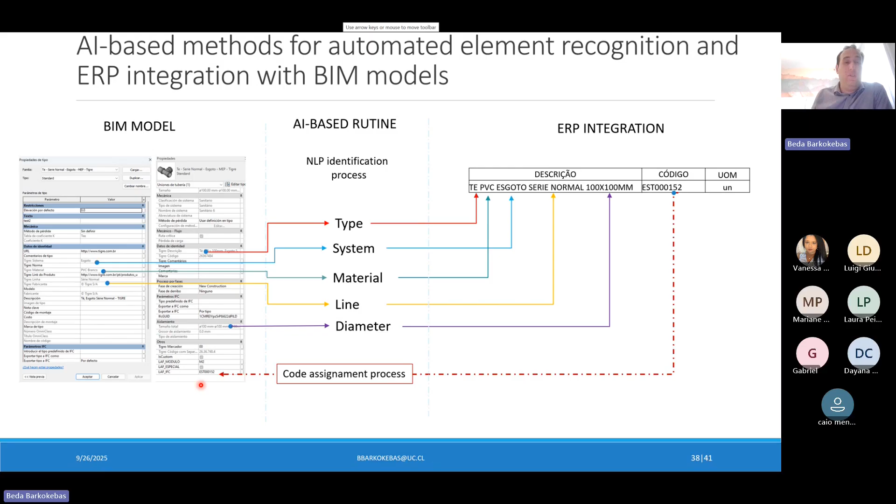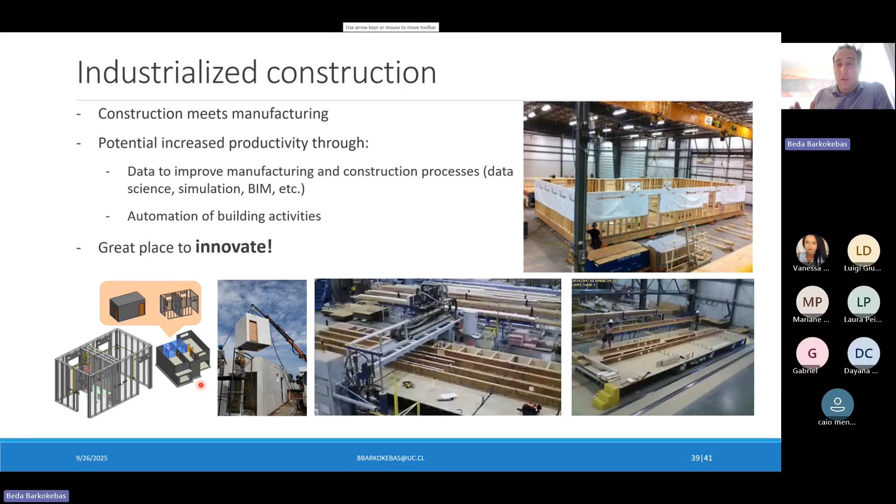So to wrap up, I'm sorry, I spoke too much, but I think I would like to finish this presentation just showing you that in industrialized construction, you have a lot of things to do. It's a great place to innovate. So in case you guys have questions, please ask me as many as you want, and you have my email below in case you have further questions.